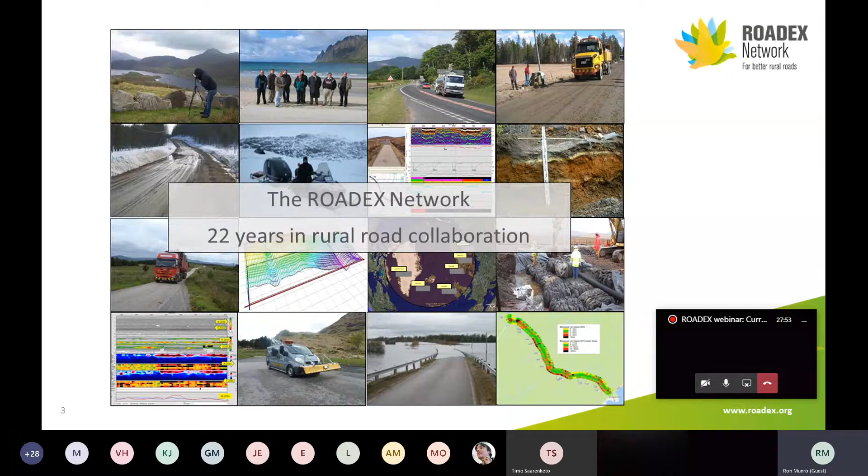Yes, it works. Good, excellent. ROADEX started off in 1998 as a pilot project under the EU Northern Periphery programme, set up to encourage cross-border sharing between European states. ROADEX was defined as a transnational collaboration of roads organisations to share best practice, research and develop new knowledge, and implement and test new solutions. It's now been running for 22 years. Up until 2012, it was part funded by the Northern Periphery programme, and now it is funded wholly by the partners themselves.

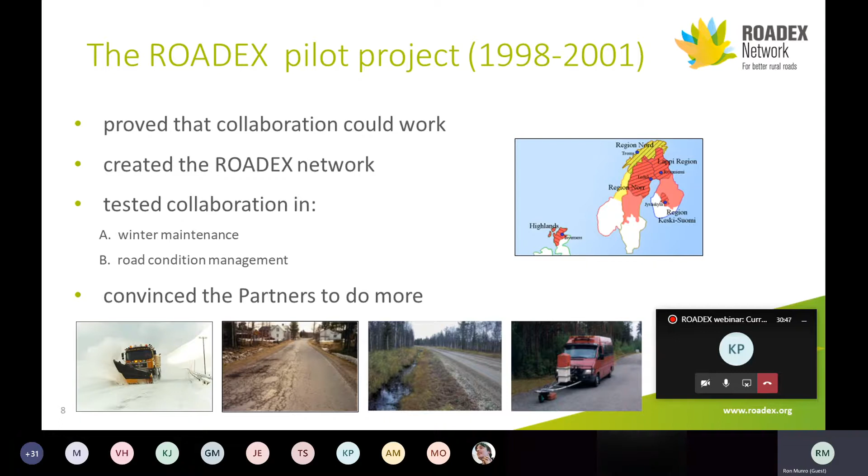The pilot ROADEX project in 1998 proved that a collaboration across countries could work and created a network despite the obvious differences in languages, currencies, and organizations. It tested collaboration on winter maintenance and road condition management. The winter maintenance collaboration proved difficult; winter conditions across the areas were just too varied to productively share information. Road condition management, on the other hand, immediately showed benefits and convinced the partners to do more.

The pilot project identified 5 common problems across the countries, and these still form the foundation for all ROADEX considerations today: road drainage, the number one problem everywhere; heavy trucks and permanent deformation; poor quality road materials; roads on peat; and widened roads. These problems are still common across the ROADEX area, from Lapland to Ireland.

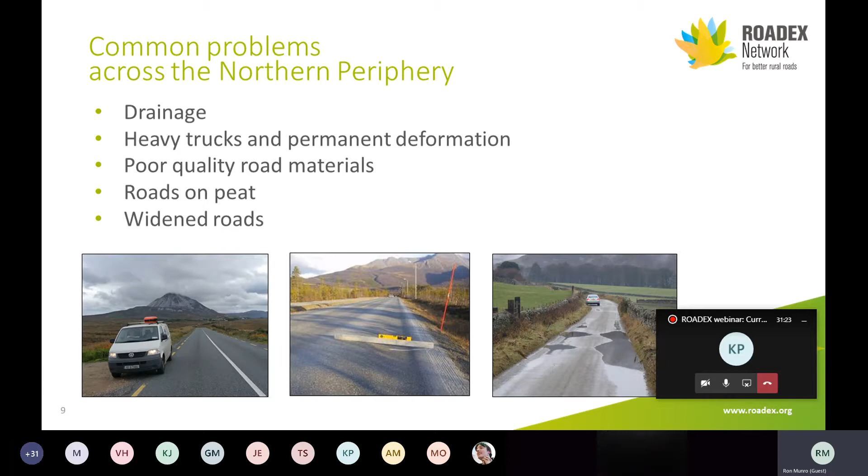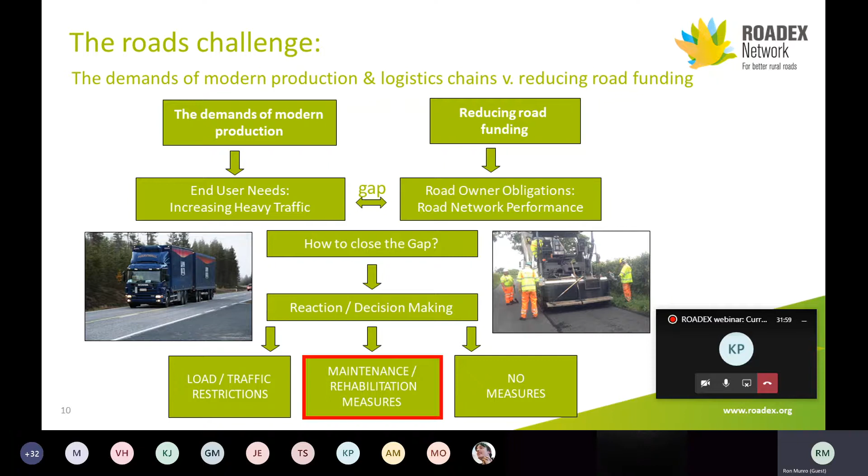This slide shows the challenge faced by every road organisation: how to deal with growing expectations of modern production and logistics chains in times of reducing budgets. The bottom line shows the 3 options open to the manager: apply load or traffic restrictions, carry out rehabilitations, or do nothing and blame the politicians. ROADEX takes the proactive middle course: maintenance and rehabilitation measures.

The ROADEX philosophy can be simply stated as focus, focus, focus. Use precise survey to map the weak sections of road and focus in on them. Focus on understanding the underlying reasons for the problems on the road. Innovate and design fit-for-purpose structures and treatments for the weak sections of road. Look at the timing of any work. Not everything needs to be fixed at once, apart from the drainage.

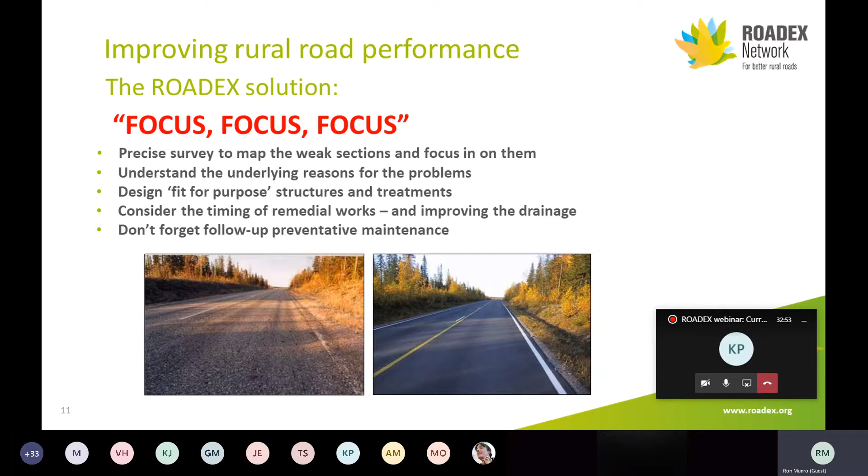And make sure there is follow-up maintenance after the work. The weakest sections on a road define the route in the eyes of the road user. Focus on these and road maintenance for the best use of your available resources.

ROADEX recommends a detailed survey to understand what's happening in and under the road: video, drainage, GPR, falling weight, and many others, all collected digitally to GPS to permit repeatability and to identify any trends over time so that early proactive action can be taken. The data can then be processed together using modern techniques and cloud storage for use across organizations, both in-house and on-site.

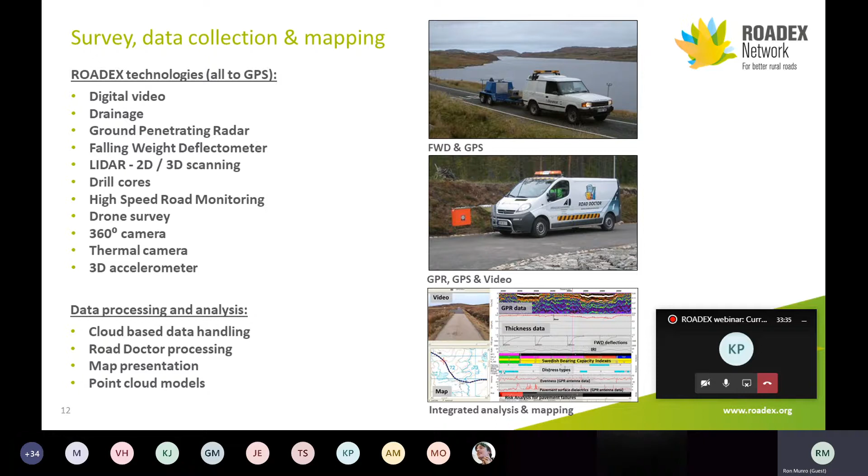Results can be output in many ways: maps, models, animations, depending on the outputs to be shown and what the end user wants.

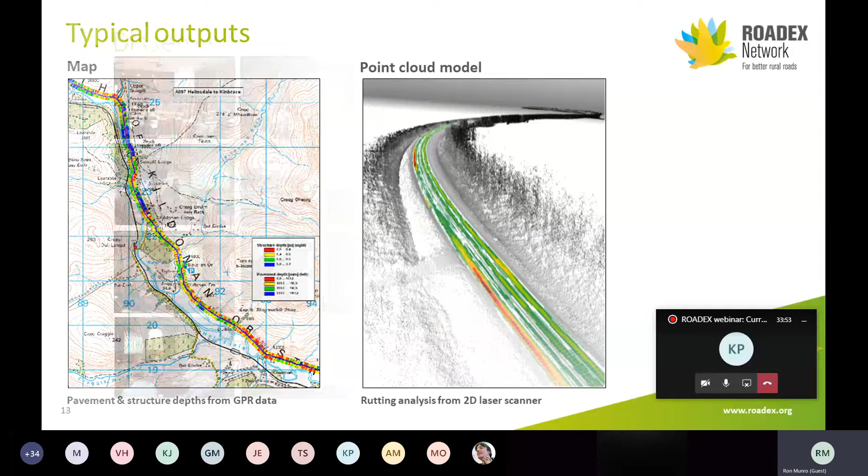ROADEX disseminates its results as widely as possible: webinars like today, seminars, workshops, face-to-face meetings, and more recently through social media such as Facebook and Twitter.

The ROADEX website, www.roadex.org, is the heart of the ROADEX dissemination strategy and is a live site. Everything that's been done in ROADEX is on this website, and we're making real efforts to keep it current with new developments, as you will hear today.

The key part of the website is the Knowledge Centre: all of the ROADEX information in one place, projects, reports, case studies, research, all accessible and all free of charge.

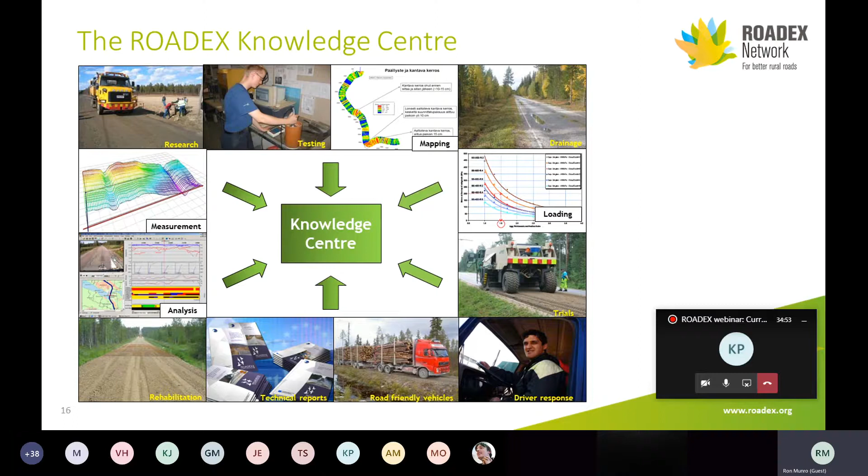The website holds the 4 ROADEX e-learning lessons on permanent deformation, roads on peat, drainage of roads, and environmental considerations for roads. More on these later. The lessons have received excellent reviews since they were released and are now actually being used as self-learning undergraduate training packages in some universities. They're being brought up to date as we speak.

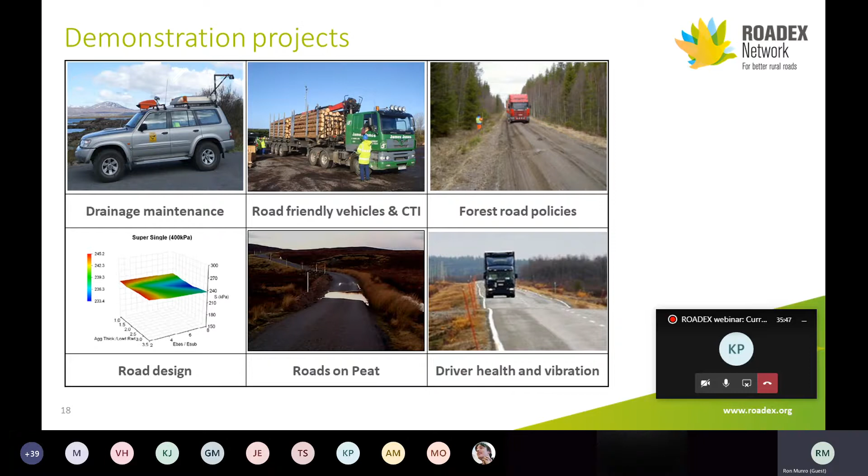ROADEX tests its technologies in demonstration projects. Typically, these have been in drainage maintenance, road-friendly vehicles and central tyre inflation, forest road policies, road design, roads on peat, driver health and vibration.

ROADEX has also carried out research projects: adaptation measures to meet climate change, best practice in road widening, and more research into the effects of vehicle and human vibration. Again, the results are on the website.

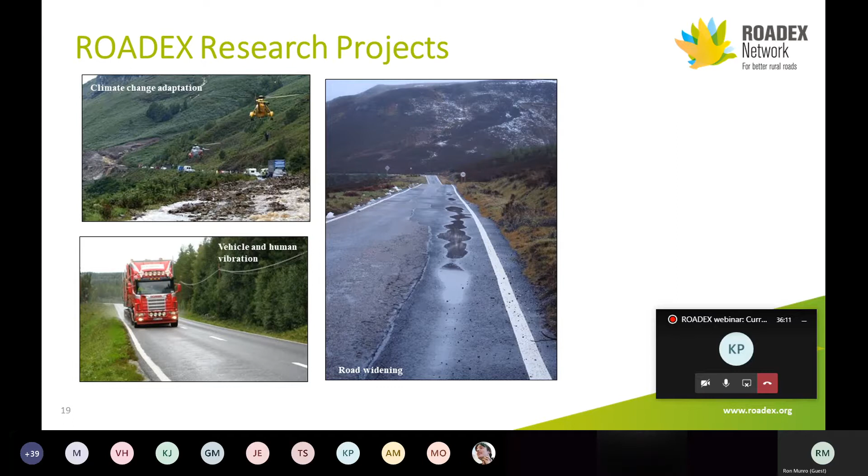In summary, ROADEX promotes survey methods and analysis techniques, changing the traditional visual inspection methods to modern road speed machine surveys referenced to GPS and outputting the results in easy to understand visualizations.

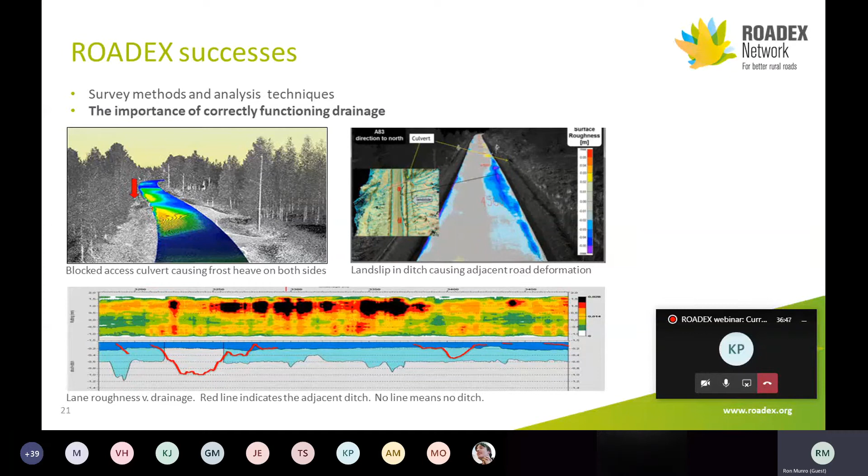The importance of correctly functioning drainage: this is all too often forgotten under daily pressures and budget constraints. Getting the drainage correct will always be a primary aim in ROADEX.

New materials and testing methods. ROADEX has carried out really good work with new materials, additives, and new testing methods, all on the website.

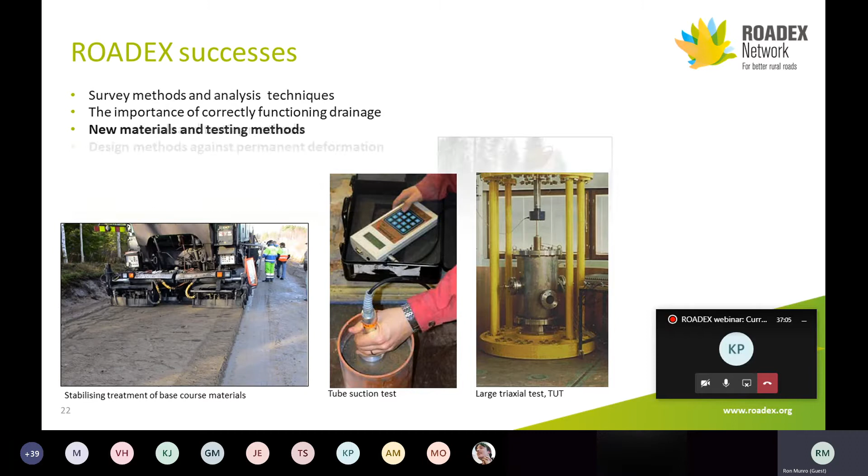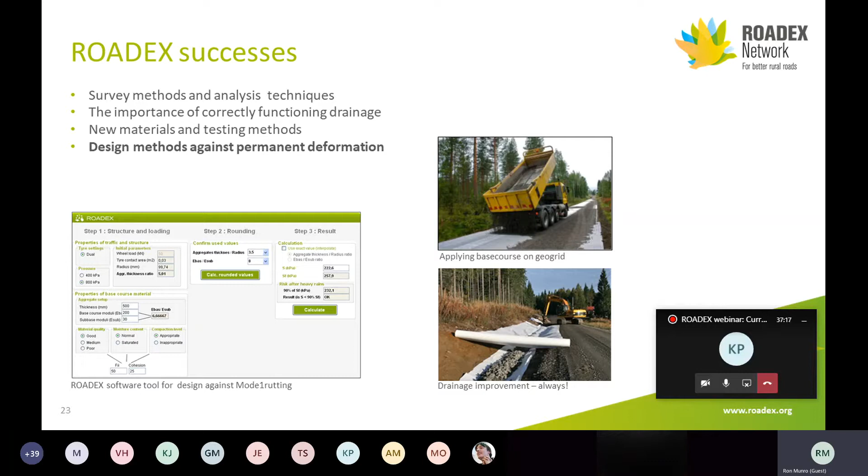Design methods against permanent deformation: these are new design philosophies especially suited to low volume roads based on ROADEX research. And road-friendly trucks and tyre pressure control, investigating tyre-road interactions.

That was the introduction. Thank you very much for your attention. I'll be happy to take any questions if you have any.

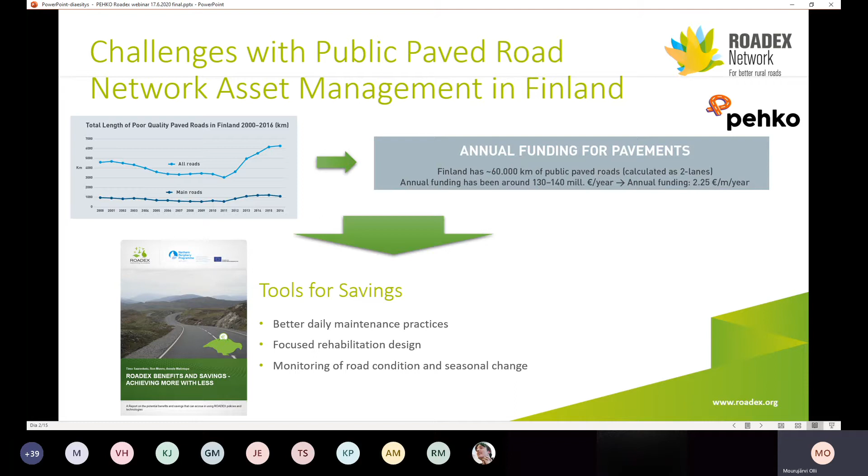And the idea was born to test these ROADEX recommendations, and the PEHKO project was born for that in Finland.

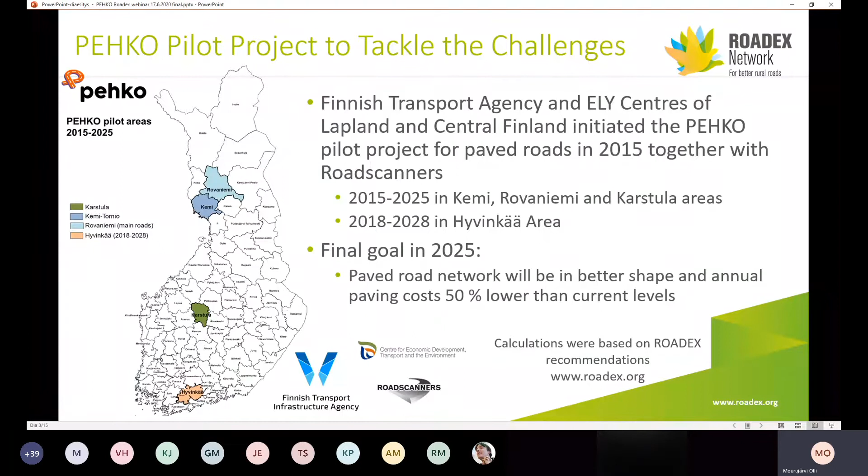The PEHKO project was started by the Finnish Transport Agency and ELY centers of Lapland and Central Finland with Roadscanners in 2015. Then in 2018, the project expanded also close to Helsinki in the Hyvinkää area. The very ambitious goal was that in 2025, the paved road network would be in better shape and annual calculated paving cost would be 50% lower than at that time. This calculation was based on ROADEX findings.

These are the measures which were decided to be taken. Firstly, maintenance improvement, especially drainage maintenance improvement. Secondly, new technology to enable focus on the weakest sections by monitoring the road network regularly. And thirdly, doing measures proactively before pavement loses strength and damages become too visible.

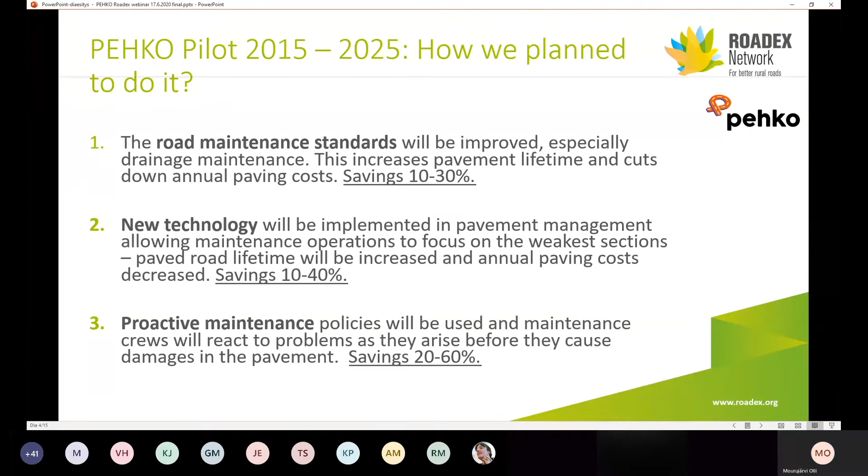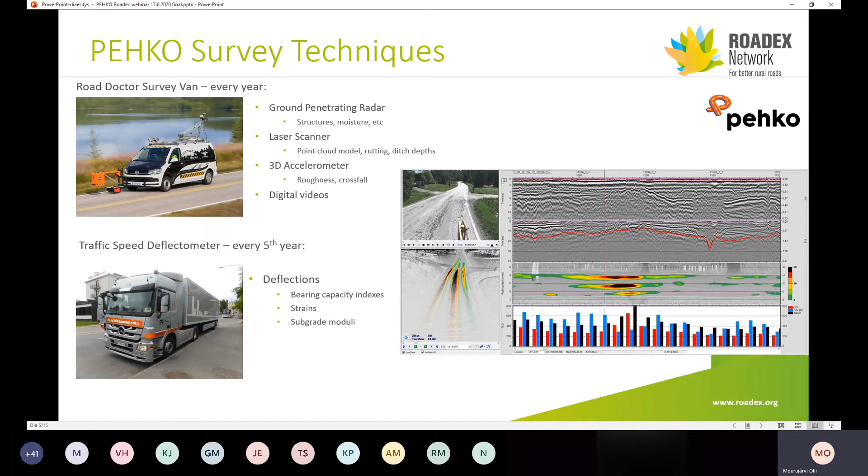In this example, the private road junction culvert is blocked or missing. Water is staying in the side ditch and being absorbed into the road structure, causing deep ruts, shown as black color.

The horizontal strain causes pavement fatigue. It seems that if the pavement is at least 150 millimeters thick, the rut increase rate is low enough and backlog is incurred only for less than 10% of the network, while under-150-millimeter pavements are causing most of the repair debt. This is a major problem in Finland, especially in northern Finland, because pavements are too thin on many roads. It is a solution for some sections to make the pavement thicker.

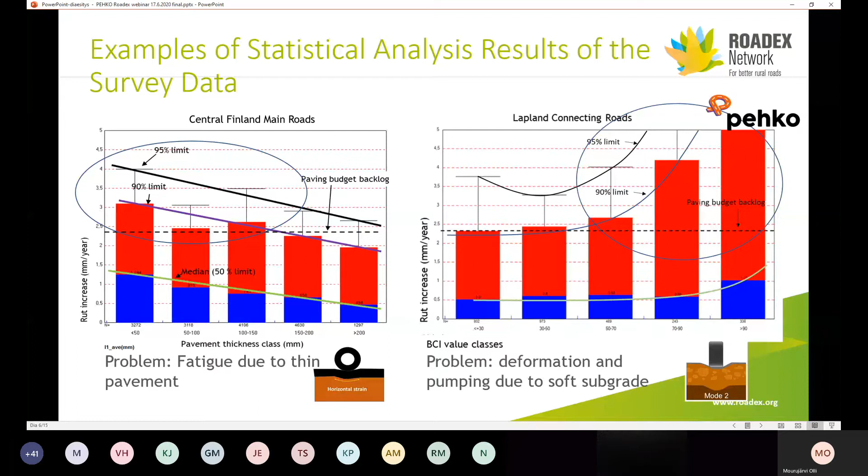Daily maintenance problems have to do with drainage. Blocked or missing culverts at private access road junctions may cause over 7 millimeters rut increase per year and are a big problem. Also, too shallow or blocked side ditches cause problems because road structure stays too wet. In areas with snow, side snow walls should be removed early enough in spring so that water does not infiltrate into the road structure when snow is melting.

Due to low financing, we have not been able to repave low volume roads in Finland, but these drainage improvements have slowed down rut increase rates, so it is a proof of their effect and a good way to improve conditions of low volume roads. Increasing use of de-icing salt in winter is an emerging problem on thin pavements, especially in Finland. We have noticed a speed up in the rut increase rate because of this de-icing salt.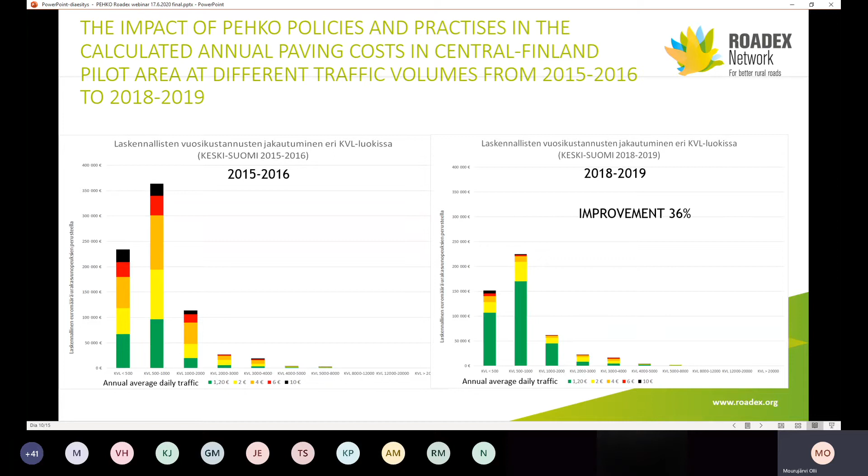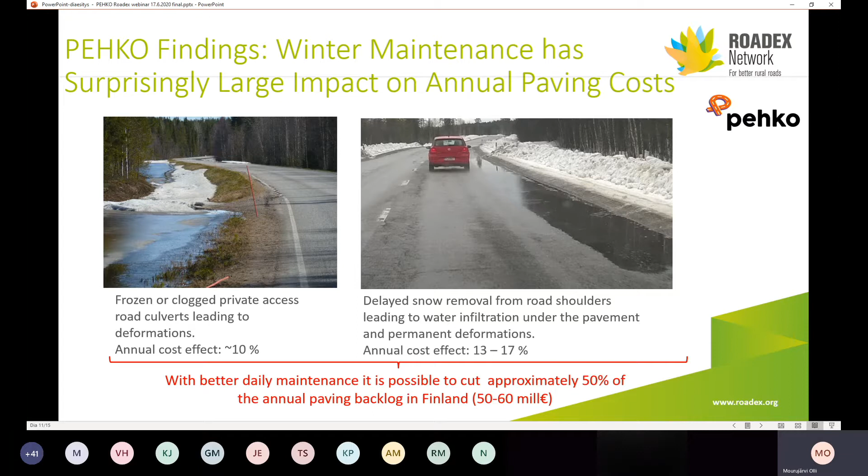And as already told, winter maintenance has a big impact on annual paving costs. The left side picture shows how water stays in the side ditch because of the private road junction problem. The right side picture shows how water does not have access to the ditch and infiltrates under pavement, causing deformations. Road shoulder verges cause similar problems in places with no snowy winters.

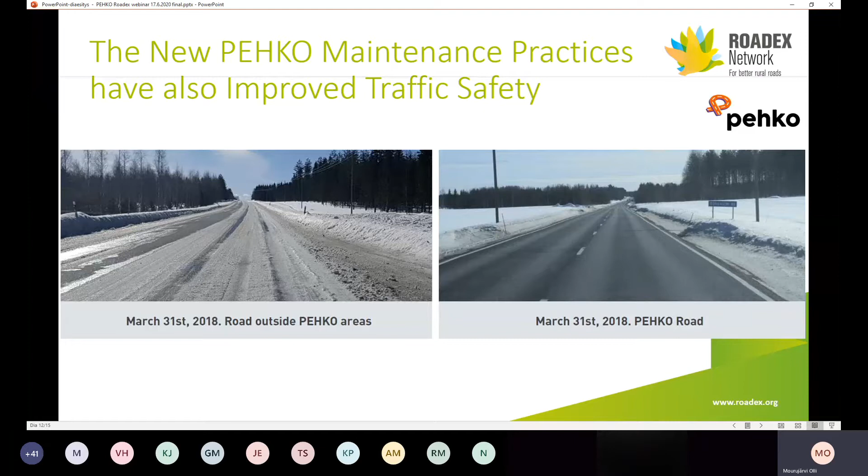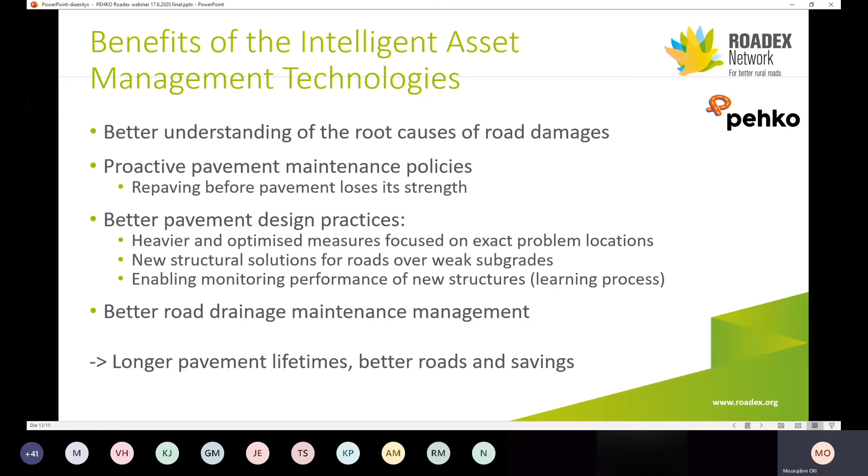Better pavement design practices by optimizing measures on exact problem locations, using new structural solutions for roads over weak subgrades, and following how old repairs perform later to learn from successes and failures. And finally, if you do not remember anything else of this presentation, remember at least that drainage is important. Drainage improvements will pay themselves back. So, intelligent asset management provides longer pavement lifetimes, which means savings in the long run.

Thanks to the good results, the Pehko project was recognized with the Global Road Achievement Award by the International Road Federation back in 2018.

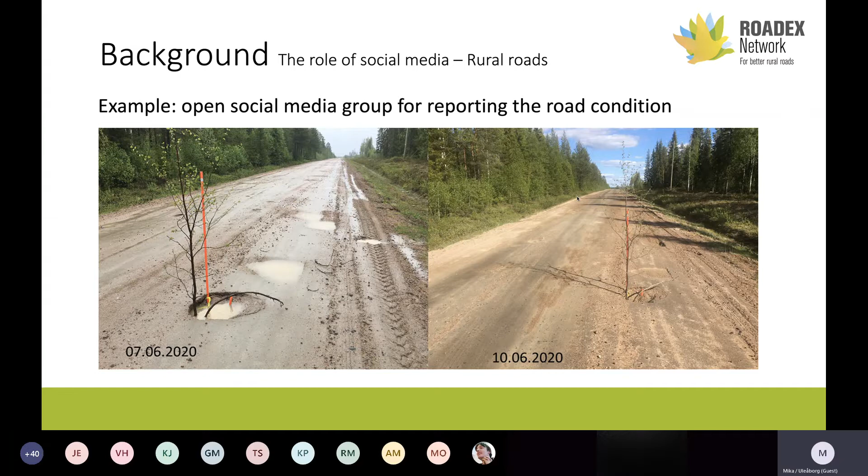And I have some examples here from Finland. For example, there's a road that is being reported in such a social media channel, as I mentioned, that on the 7th of June there's a pothole on the road, but it still exists there on the 10th. So 3 days, nothing happened. So this kind of thing will get wider. People are more into roads, for example, and certain road sections that they know might be problematic at a certain time of the year. And also the road owners are interested in getting this information from the users.

And another thing, which is not exactly the maintenance part, but I'm just showing this as an example. In Finland, there's an application called Porokello reindeer app, which gives real-time reindeer warnings. So it alerts of high risks for reindeer crashes.

So people are having this app on the mobile phone, and when they are driving around in Lapland, for example, and they see some reindeers, and they alert that there are heavy numbers of reindeers, the next car coming will get this alert, and this has been very, very successful. So this kind of a thing most likely will be quite used in the maintenance side as well.

Some words about ROADEX social media. This is not about reporting, as I mentioned earlier, but it's about reporting the ROADEX network's information and what's going on in the network, whether it's results or events we are going to attend or some other interesting observations worldwide. And we are trying to keep up that as much as possible.

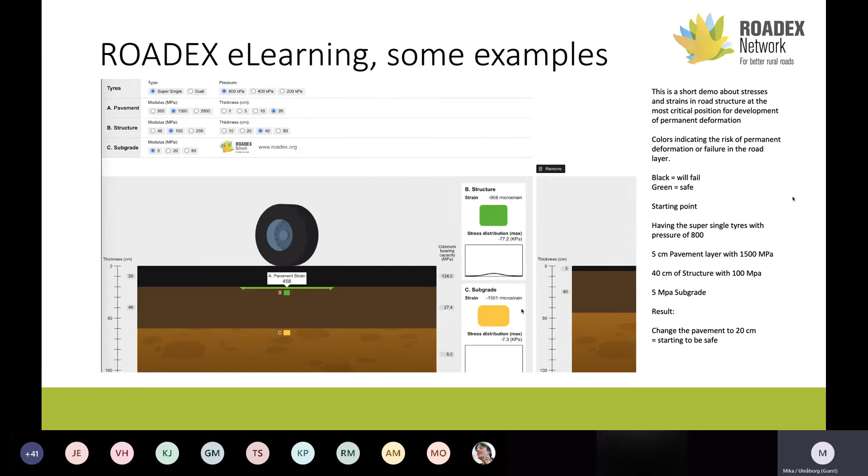And basically what you can do is compare by duplicating the current situation and then trying to test what might fit or change these things. Let's say we add some thickness for the pavement, and well, we see that we are already on the safe side. So this is just one example, and I recommend it. You can go and look for yourself. There is a lot of interesting stuff in there.

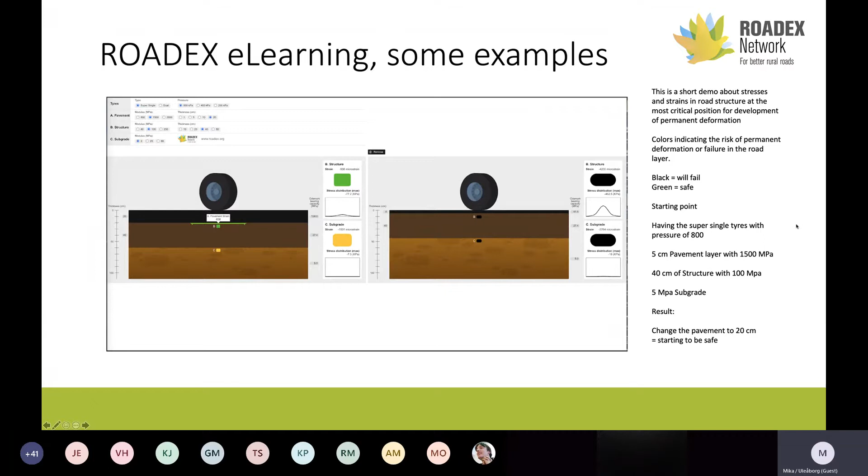So how do you end up there? Of course, you go to the roadex.org website first, and in the right-hand corner, you find this green menu where you find e-learning. By choosing e-learning, you get the selection of languages. If you pick English, you get the lessons, and eventually you end up at the lesson you choose.

And when you are in there, you go back again to the right-hand corner where you can navigate through the whole lesson or the next one and next one. So it's very, very simple. And this is built on the website, and it is mobile friendly if you are more into phones or tablets. And as I said, we are not alone.

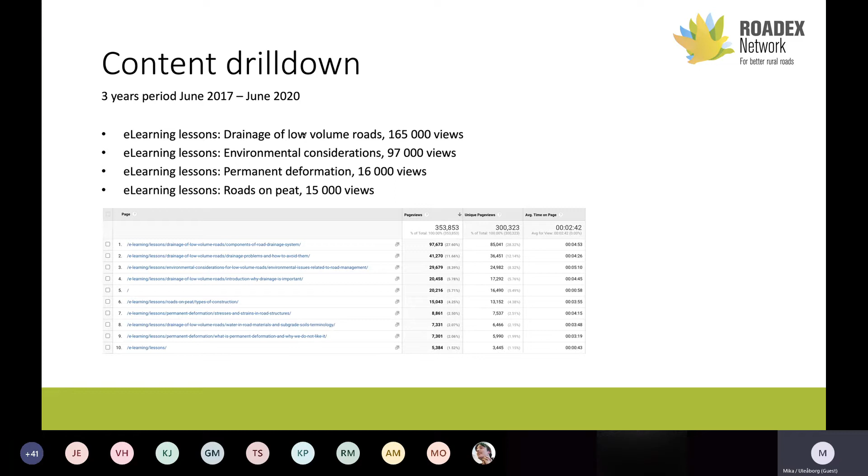piece of information. And there's a bit more statistics about content drill down. As you can see from here, drainage has actually been the most interesting topic for the past 3 years. Environmental considerations come next, and then there's permanent deformation and roads on peat. So based on this information, I think we are going in the right direction with the content provided there, and hopefully we'll keep putting in some new stuff whenever it's possible.

So the world is changing and we need to keep up and adapt, but not forget the good things about the past. So ROADEX e-learning, social media and apps will support you on the way there. Thank you. If you have any questions, please feel free to ask.

Okay, anyone from the audience? Some questions? No?

Okay, Mika, I have one question for you. We have this coronavirus today that has led to distance learning, in schools at all levels in the world and other things also. In that context, how do you see the development of such tools as e-learning in the future, or other useful media?

Well, I think people are kind of self-educated in a way that they want to dig up the information by themselves, and these kinds of tools, whether they are e-learning or some other new type of things that are coming, will probably be more and more successful in that way. And I think it should go that way as well. On the one hand, it teaches people to dig up the information by themselves, but at the same time, it keeps the information up, which is the most important thing.

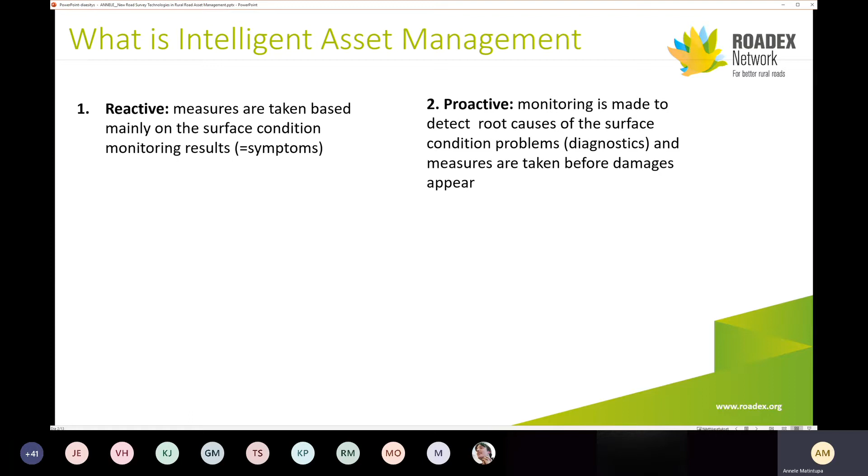So what is intelligent asset management? The traditional way to take care of road condition is reactive, where the measures are taken based mainly on the surface condition monitoring results, which in practice means the observation of visible damages on the road surface. The proactive way is to monitor and detect the root causes of the surface condition problems. Then the operations can be performed before the damages appear.

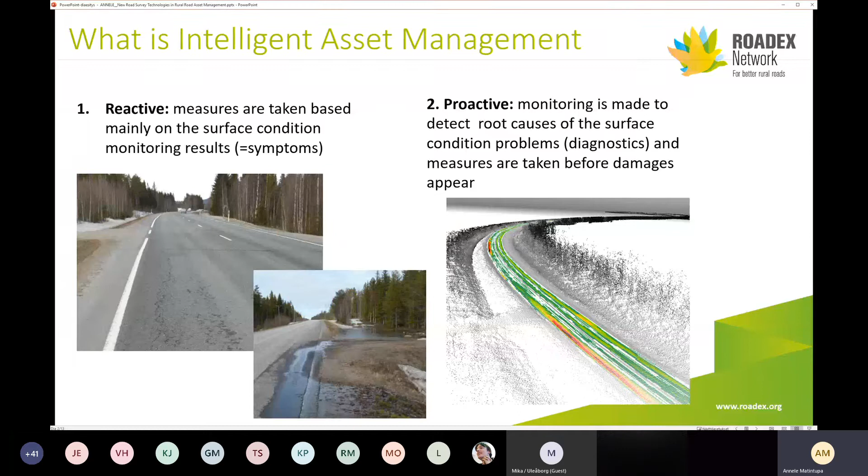Modern road survey technologies are usually understood as non-destructive survey methods. For example, ground penetrating radar, laser scanners, accelerometers together with digital video cameras and GPS provide good information on road structure. Bearing capacity can be measured with a falling weight deflectometer or with a traffic speed deflectometer.

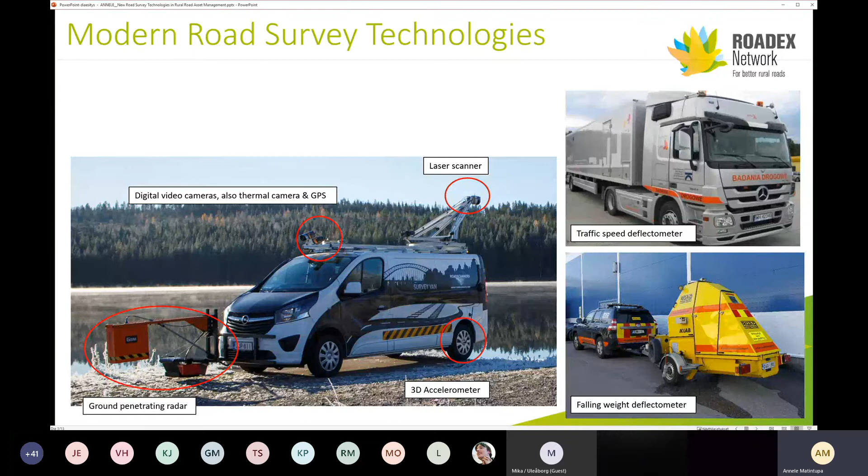Ground penetrating radar is a geophysical survey method which is based on a technique where the transmitter antenna sends a pulse to the road structure. Part of the pulse reflects back when the properties of the material change. The receiver antenna registers the time and amplitude of the pulse which is reflecting back.

The GPR data can be handled and analyzed with several methods, and many different parameters can be got as output. For example, layer thicknesses like pavement, base course, and the total thickness of road structure. Also asphalt air voids content, moisture, frost and ice lens detections. Also different cracking and delamination can be localized.

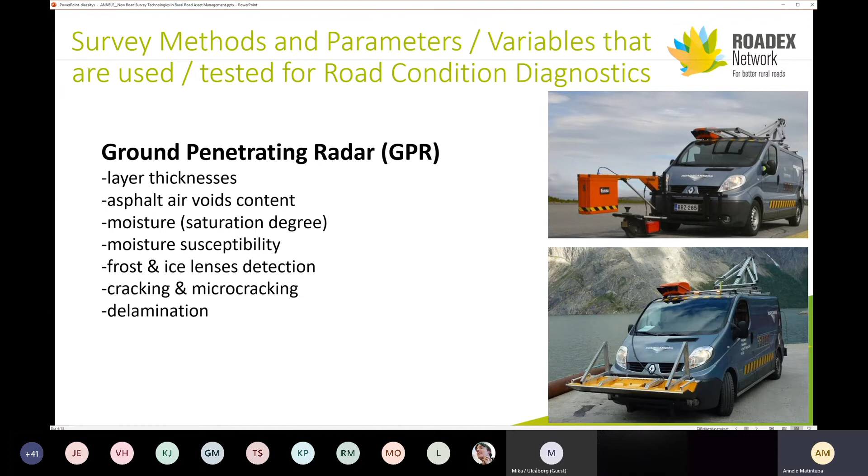Laser scanning is a technique where the distance measurement is calculated from the travel time of a laser beam from the laser scanner to the target and back. When the laser beam angle is known and beams are sent out in different directions from a moving vehicle with a known position, it is possible to make a 3D surface image or point cloud from the road and its surroundings. In the point cloud with millions of points, every point has an X, Y, and Z coordinate and a number of reflection or emission characteristics.

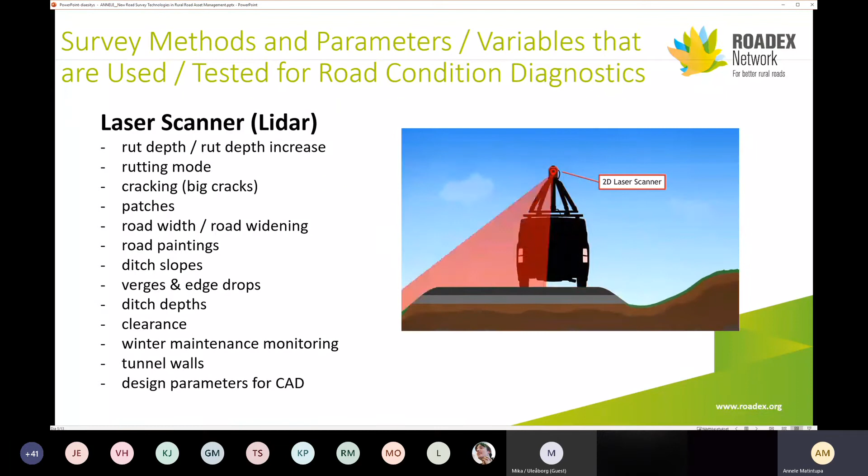Laser scanner measures 100 profiles per second. That means, depending on the driving speed, cross sections are from 5 to 20 centimeters apart. The density of points is the most dense on the road surface and becomes sparser outside of the road area. From the laser scanner data many parameters can be calculated, such as rut depths, cracking, patches, ditch slopes, verges, and so on.

And here is an example of how laser scanner data can be used in road condition analysis. Laser scanner measurements have been performed in years 2015 and 2016. Rut depths have been calculated from data of both years. By subtracting these values, the rutting increase will be got as a result. Here you can see a place where rutting increase is more than 7 millimeters per year.

Observing the road area as a whole, it can be seen that the reason for this is a private road access and its poor performing or totally missing culvert. This should be fixed before it causes more expensive and serious problems.

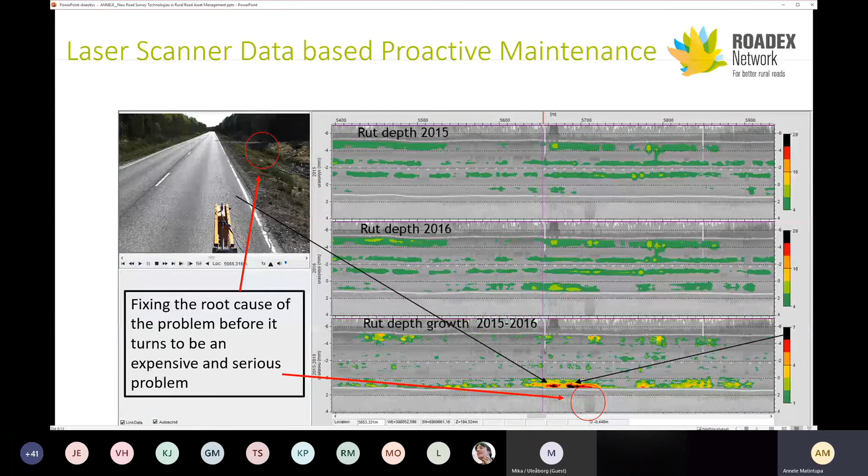Accelerometer is a device that measures acceleration forces. The position, acceleration, and angular velocity are measured in different directions: back and forward, sideways, and up and down. Acceleration is the second derivative of position. When a car drives over a road with roughness, the roughness produces accelerations to the car tire. Bigger amplitude and shorter wavelength of the roughness produces larger acceleration. In other words, severe road damage produces large acceleration.

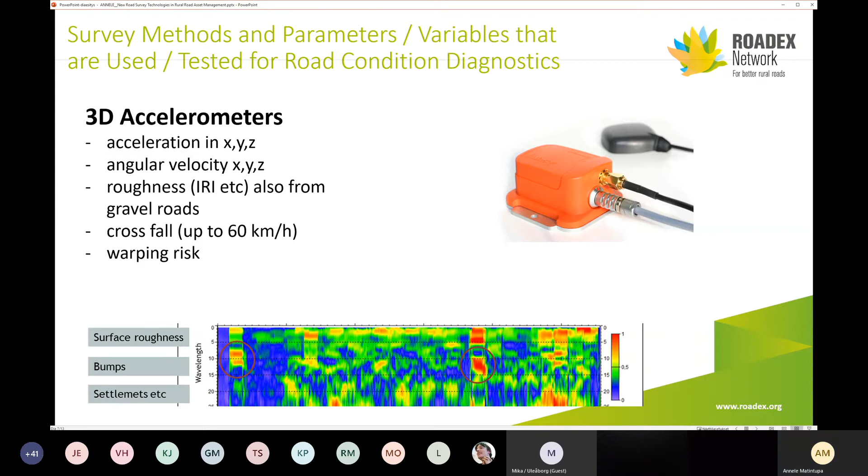Together with GPS positioning system, the measured accelerations can be positioned on the road. The accelerations also depend on the driving speed, so a constant driving speed over the whole section is desirable. Accelerometer measurements are working well also on gravel and forest roads. So accelerometer data can be used also regularly to follow how roughness will develop.

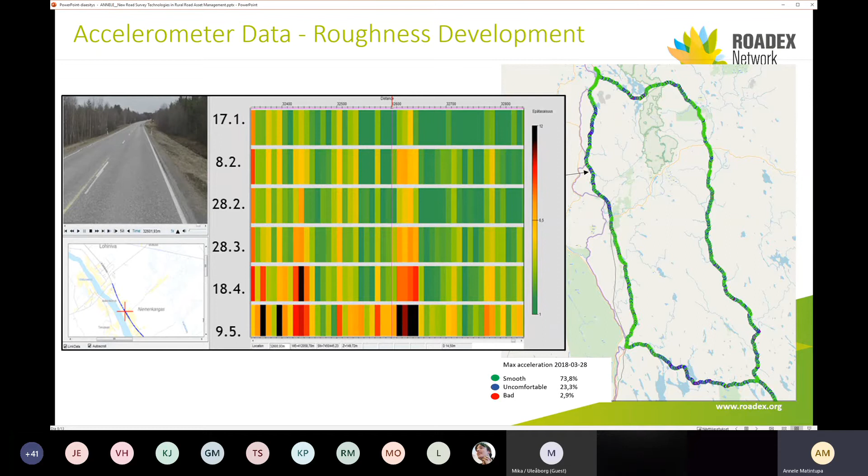Here is an example from northern Finland where a test route has been measured several times during the winter and springtime. On some sections spring thaw weakening symptoms arise. Roughness turns to be more severe as springtime goes on. These measurements were also possible to follow online on the internet during the measurements.

Traffic speed deflectometer and falling weight deflectometer are used to evaluate bearing capacity and related parameters. Traffic speed deflectometer measures with lasers the speed of surface deflection. Based on that, the value of deflection can be calculated. The results can be utilized the same way as more traditional falling weight deflectometer results.

The falling weight deflectometer device consists of a weight that drops from a pre-specified height on a plate that is supported by rubber dampers that rest on a road-based circular plate with specific diameter. The drop of the weight is designed to simulate the load produced by a passing heavy vehicle. The load applied to the road can vary from 20 to 150 kilonewtons, although the most common load is 50 kilonewtons on a 300 millimeter loading plate. The deflection is measured by multiple geophones placed radially starting from the center of the load plate.

From the data, different parameters can be analyzed and calculated, like SCI, surface curvature index, BCI, base curvature index, and pavement strain. With the falling weight deflectometer or traffic speed deflectometer values and layer thicknesses interpreted from GPR data, the substructure and subgrade modulus values can be calculated.

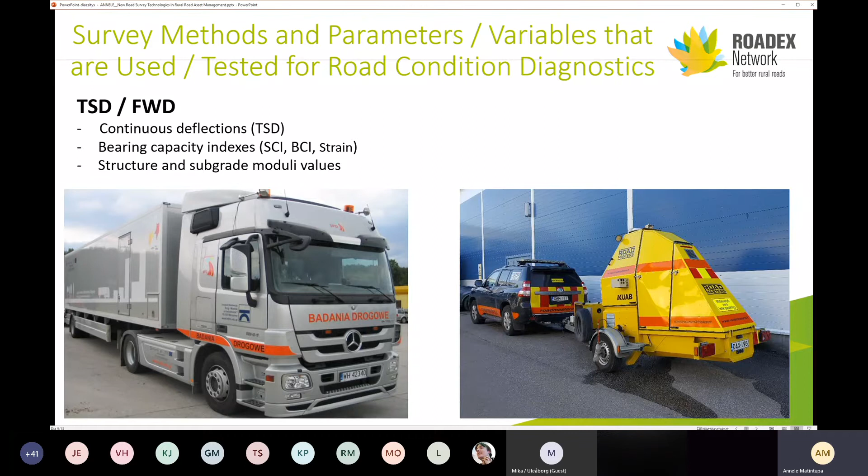The SCI is calculated by subtracting the D200 deflection value, or in some countries the D300, from the D0 deflection value. It can be very useful in determining if a road has mode 1 rutting problems. This gives an indication of the stiffness of the pavement and the top part of the unbound base course. A high SCI value indicates a risk for mode 1 rutting.

The BCI value is calculated by subtracting the D1200 deflection value from the D900 value, and it's an excellent indicator of how road structure can spread a wheel load over a weak subgrade in order to reduce the vertical stress at the road structure subgrade soil interface. If the BCI value is high, this indicates either mode 2 rutting or pumping problems.

A strain value is calculated based on GPR and falling weight deflectometer or traffic speed deflectometer data. It indicates the fatigue damage risk of pavement.

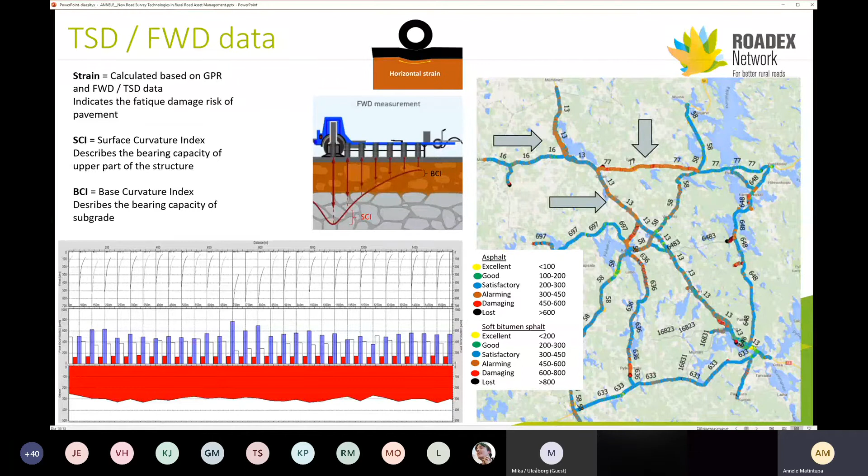In this example, there are a few sections where damages can be seen. Also BCI values are quite high, and strain values too, at the same place where rut depths are quite deep. Also the total thickness of the road structure is thinner in this section. As an analysis of all the data, it can be said that the main reason for the damages is again the private access road and its missing or poor culvert.

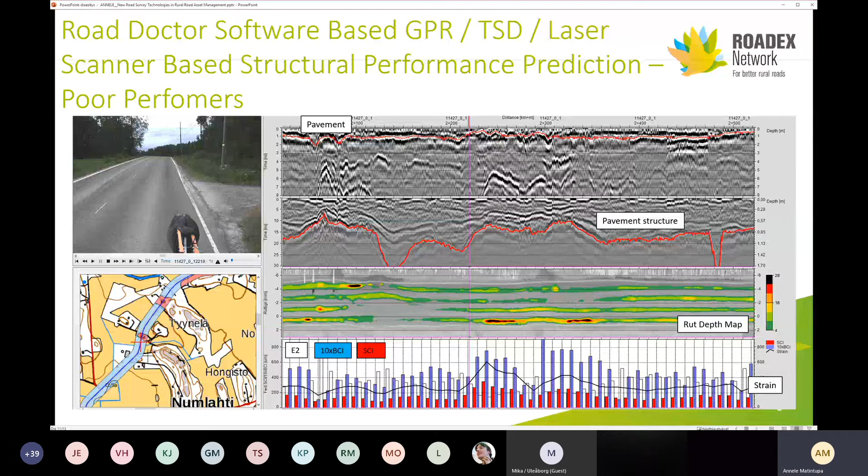So how can we summarize the benefits of new modern survey techniques? The development of these techniques has been very rapid in past few years. Nowadays, it is easy to observe a lot of data and different parameters together, not only of road surface, but also from its surroundings.

The TSD method provides continuous information on bearing capacity with a high-speed survey. On local roads, where the changes in bearing capacity are sudden and local, the dense testing interval is very important. Note that on the smallest roads, this method cannot be used because the truck needs enough space.

With the combination of modern data collection methods and joint analysis of the results, the diagnostic capabilities for road problems reach new levels. There are many possibilities to develop automatic diagnostic methods. The actual reason behind a road's anomalous behavior can be found, and evaluations of life cycles can be done. This makes proactive maintenance possible, and great savings in road life cycle cost can be achieved.

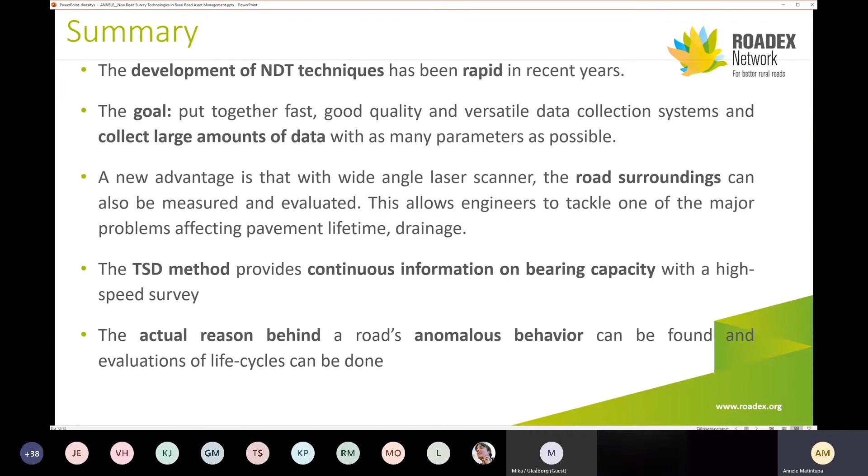And thank you all for listening to my presentation.

Thank you, Anneli. Any questions from the audience? No? Okay. Anneli, you mentioned that digitalization and new techniques are expanding rapidly, and as we've seen here, you showed some powerful tools in road management. What do you think about the future? How will it be? Can you see where the fastest development is, or where will it be in 5 to 10 years' time? Do you have any opinion?

I think the methods will be more exact, maybe also easier to understand and internalize. We can see beyond the surface, all structures, and in the future also 3D models are quite common. And I think we can also analyze and recognize material properties better, and maybe also the time slices are important. Based on this, I think proactive maintenance is more possible in the future.

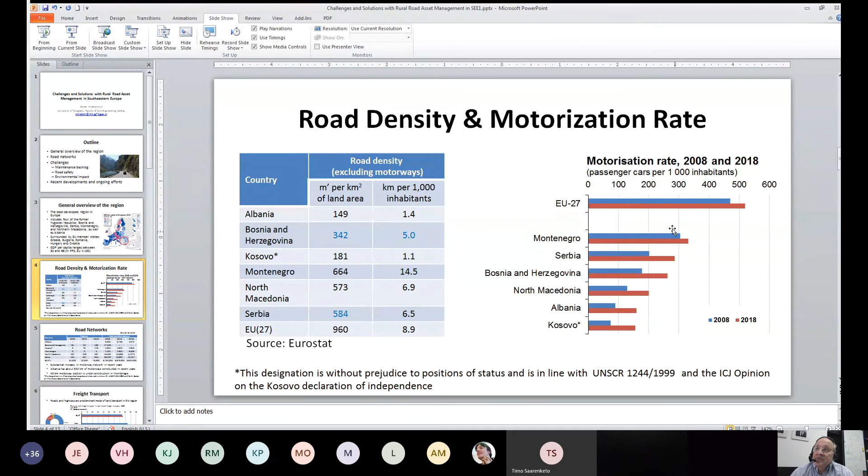When we talk about road network and road density, you can see that there are some countries with relatively decent road density compared to the EU average. But for example, Albania or Kosovo have substantially lower density of road network, and also when compared to population, a really small density of the network. All of these are transition economies, so motorization level is growing - people are still buying cars here - but we are still lagging behind the EU average. In Montenegro, the average is about 300-something vehicles per 1,000 inhabitants. In all other countries, the motorization rate is lower.

But in recent years, in the region there was a trend to build motorways. So the motorway network was expanding quite fast in some of these countries.

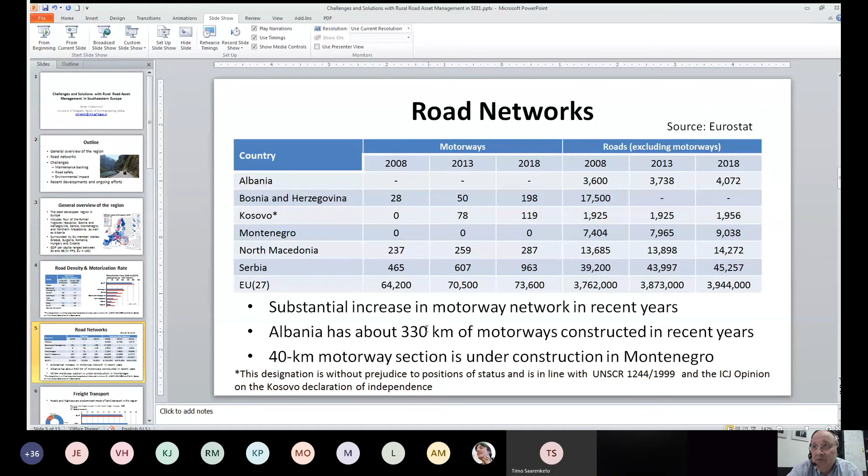For example, in Serbia in recent years, and in Kosovo and Albania too, although Eurostat doesn't show it, there are about 330 kilometers of motorway network that has been completed in recent years. These countries are trying to improve the network, but the issue is that many of these projects are not well prepared. Traffic level is relatively low, and on most of these motorway sections it's below 10,000 vehicles per day, which can hardly justify the motorway standard that has been implemented. And the revenues from these motorways cannot even pay back for maintenance. So that's one of the problems in the region.

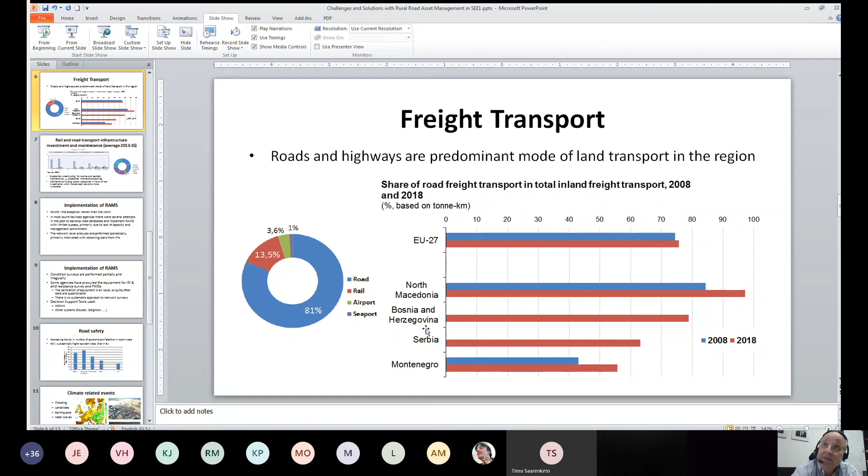As I said before, the focus is on building new sections, and unfortunately maintenance is in second place. In most of these countries, the majority of investment, sometimes ranging up to 2% of GDP, is basically for building new road sections because of this relatively limited road density. Then there is no money for maintaining existing networks, which causes rapid deterioration of the network. So instead of proactive maintenance, we are in reality doing reactive maintenance, when there is money for it.

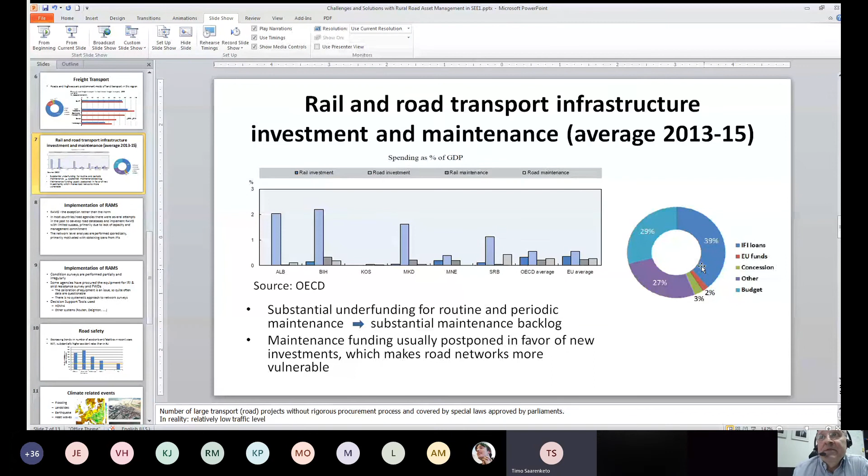These new projects are mainly financed by international financing institutions. There are some EU grants for some sections, and some portion of these works are financed from budget, but involvement of private funds is still very limited. In the region there were some successful projects in airports, but not yet in road networks. In Croatia there were a few road concessions that were quite successful, but in these other countries there were no similar projects.

Several road administrations in the region tried to implement road asset management systems in the past, but typically with limited success. These efforts included development of databases and comprehensive surveys of networks, but there was no continuity, limited by lack of capacity and lack of management commitment. In my opinion, the issue was that network-level analysis was performed only sporadically, and the primary motivation was to get a new loan from international financial institutions for new sections, while maintenance of the existing network suffered a lot.

Some of the agencies procured some survey equipment, not sophisticated like Anna mentioned in the previous presentation, but there is no strategic approach as to whether these agencies are going to conduct surveys in-house or outsource this service. There is also a lack of capacity - they don't perform calibration of this equipment as needed, so sometimes the results of these condition surveys are really questionable.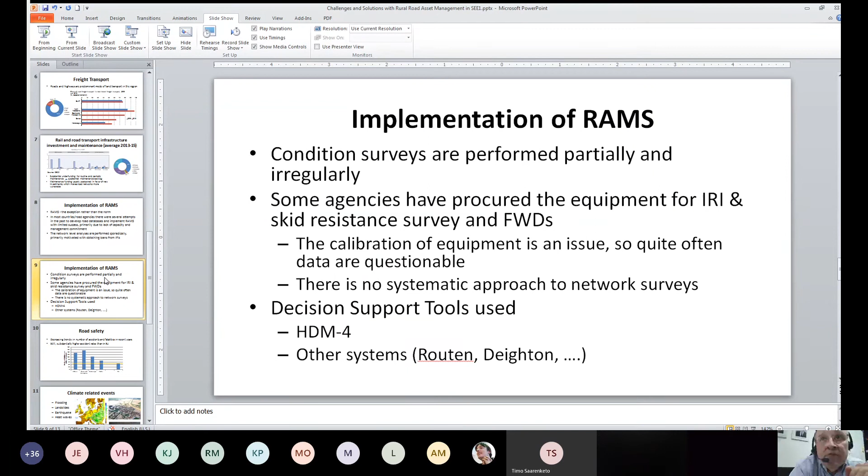Regarding decision tools that were used, as most of these projects or implementations were initiated by the banks, especially the World Bank, they forced or insisted on using HDM-4 as the decision tool, at least in the beginning. But then there were some other tools also used in past or ongoing projects. As I said, there are many common problems that were also identified in the ROADEX network, which are also very relevant in our region.

But also we have, for example, one problem related to road safety. As you can see, the number of accidents and fatalities is still probably the highest in Europe, substantially higher than the EU average. Despite all these efforts to reduce the number of accidents and improve safety, the rates are still really high.

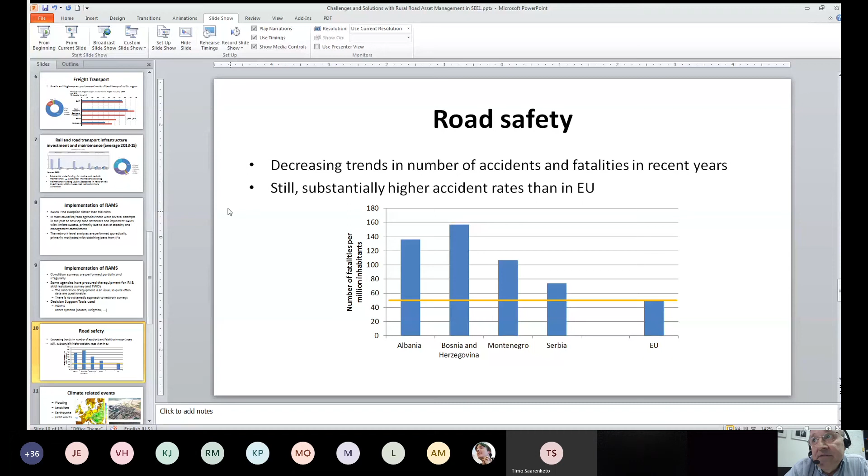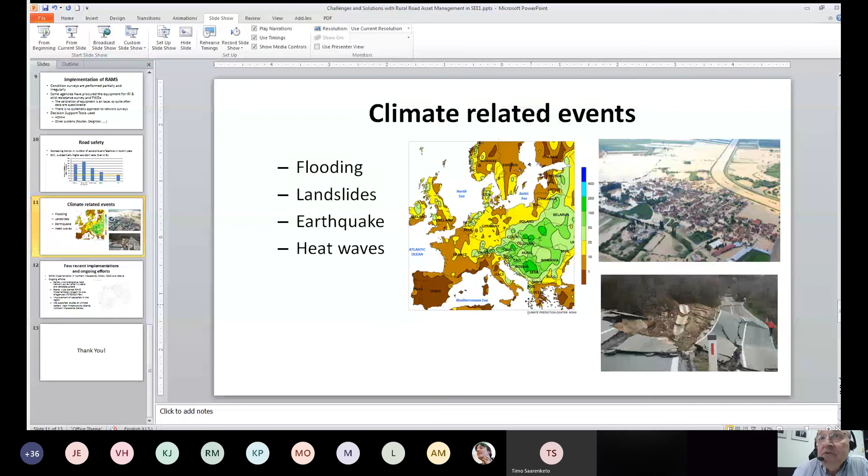So, as a team, we work together on some of these projects in the region in Macedonia. I think we did one successful implementation of a road asset management system that included the GPR measurements, that included axle weight surveys, which were important because there were a lot of overloads in the region, in the country, that is causing also deterioration.

Also, there was a successful implementation of the system in Albania, and now this project in Serbia includes a comprehensive road condition survey and development of the database. But I think it's the fifth time in the recent 20 years that the road administration is doing a survey and developing a database. My problem is that this information is not in reality used in everyday management of the road network.

A project just started in Bosnia. In Bosnia, the situation is very specific because they have 4 road agencies, because they have 2 entities. So it's quite a complicated situation, but one of these agencies just started the implementation of the project, and other agencies are also pressed by the banks to implement road asset management.